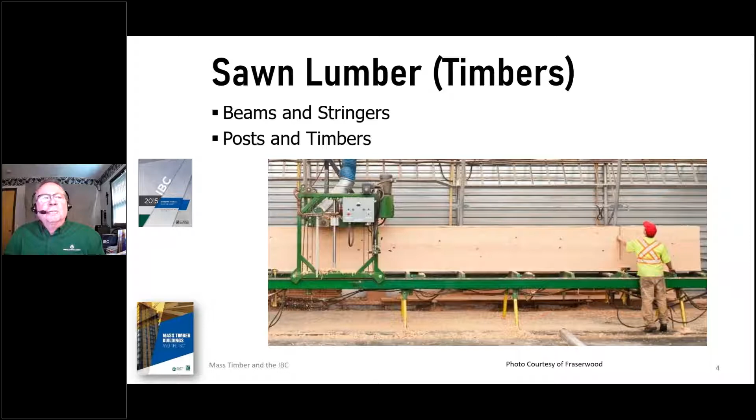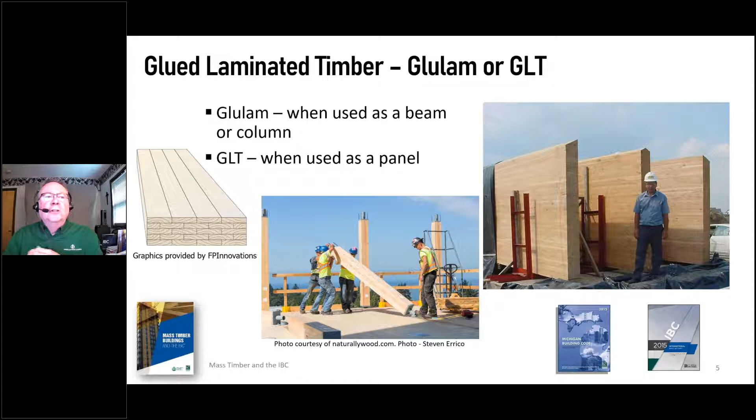Mechanically laminated decking, more commonly referred to as nail laminated timber or NLT, is not so much a product as it is a mass timber element typically made up of appropriately sized sawn lumber that is placed side to side and stitched together with nails. Mechanically laminated means we connect and transfer the load through a very specific and designed load path, which requires a specific fastener schedule to comply.

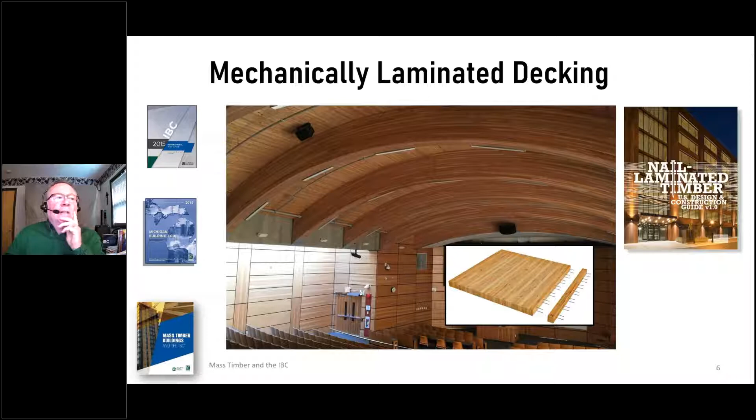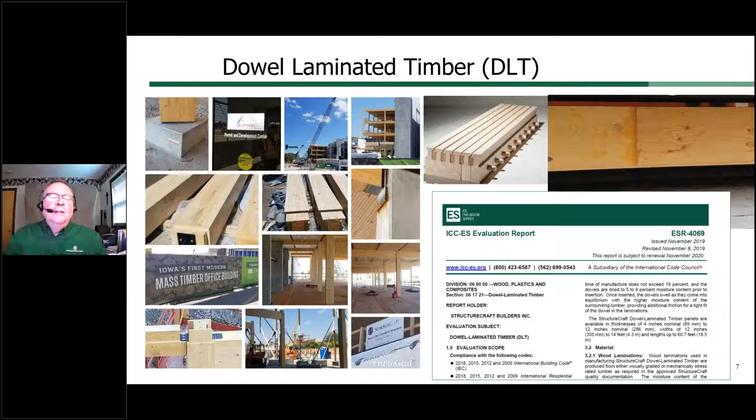Here we have structural composite lumber. Structural composite lumber, or SCL, is a family of engineered wood products created by layering dried and graded wood veneers, wood strands, or wood flakes with waterproof adhesive into blocks of material known as billets. These billets are subsequently milled into specified sizes. Structural composite lumber is defined in the IBC and includes parallel strand lumber, laminated strand lumber, laminated veneer lumber, and oriented strand lumber.

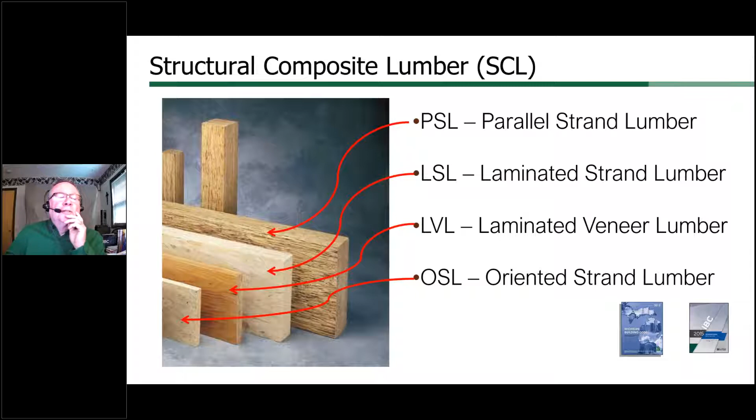Next is CLT, or cross-laminated timber. A CLT panel might look similar to the GLT panel from an earlier slide, but in this case, the lumber laminations are provided in an odd number, with each lamination laid up 90 degrees to the previous one. The odd number is so the top and bottom laminations run in the same direction.

You'll note the similarities to plywood sheets, but instead of thin veneers running 90 degrees to one another, for CLT you have those layers on a much larger solid sawn lumber scale.

As a note, CLT, as opposed to GLT panels or NLT panels, has a two-way strength axis. Remember that the strongest configuration is when the CLT panel is installed with its top and bottom laminations perpendicular to a bearing wall or supporting column and beam line below.

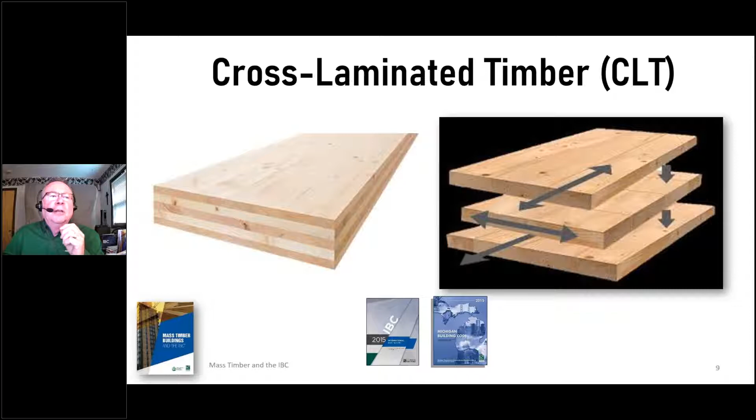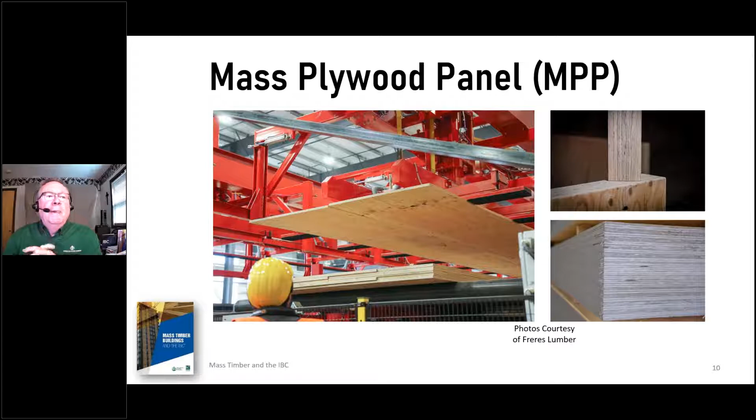Mass plywood panels, or MPP, are actually the newest on the block. They're manufactured using plywood sheets as the laminations to make up the large thicknesses required to be considered mass timber within the building code. This is a new product that would typically require acceptance by the code official as an alternate on a project until such time as MPP is referenced within the building code.

For the next few slides, I'd like to touch on some of the significant changes regarding mass timber that have taken place in the newest editions of the building codes, starting with the current building code in Michigan, the 2015 IBC. The 2015 IBC has provisions to allow mass timber products in all types of construction, but 2015 is when the manufacturing standard and provisions specific to CLT were included.

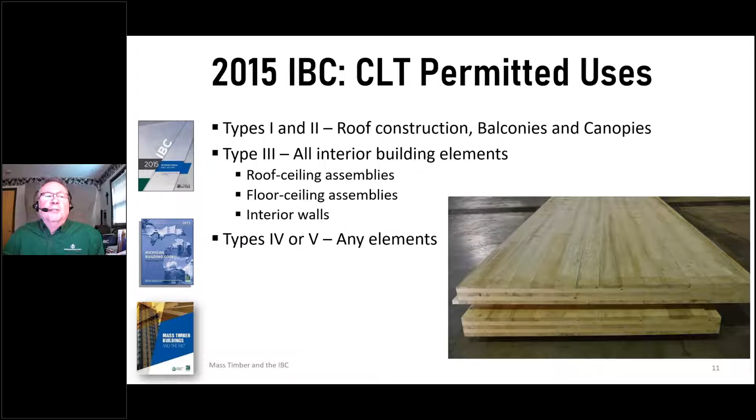This slide is specific to the permitted uses for CLT. For types 1 and 2 construction, CLT can be used for roof elements or for balconies and canopies. For type 3 construction, CLT can be used for all interior building elements. For types 4 and 5 construction, CLT can be used for any of the building elements.

We're now moving up to the 2018 edition of the IBC. This slide is just a short list of what might be considered the significant changes related to mass timber that have taken place in the 2018 edition of the IBC. You'll note that I've included the code change number in parentheses for those who want more details. We have all of that information available on our website for you.

I included in section 510.12 as the first item, a special occupancy pedestal provision allowing up to a 9-story CLT building of R1 or R2 use.

In section 602.3, CLT is allowed for exterior walls of type 3 construction. Throughout section 602.4, SCL elements were added. Provisions for the safe use of concealed spaces were added for type 4 construction. Also in section 602.4 is included the allowance for the use of GLT and SCL elements as part of a CLT exterior wall when you're in type 4 construction.

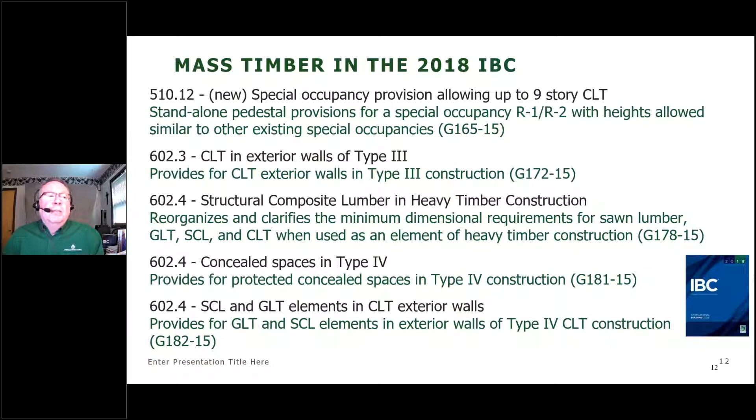Here's a little more detail on one of the 2018 IBC significant changes. In the 2018 edition of the IBC, the minimum dimensions for heavy timber have been reorganized and moved from Chapter 6 to Chapter 23, the wood chapter, with no changes in the minimum size requirements. The familiar table shown here has always been known as Table 602.4, but by moving it becomes Table 2304.11.

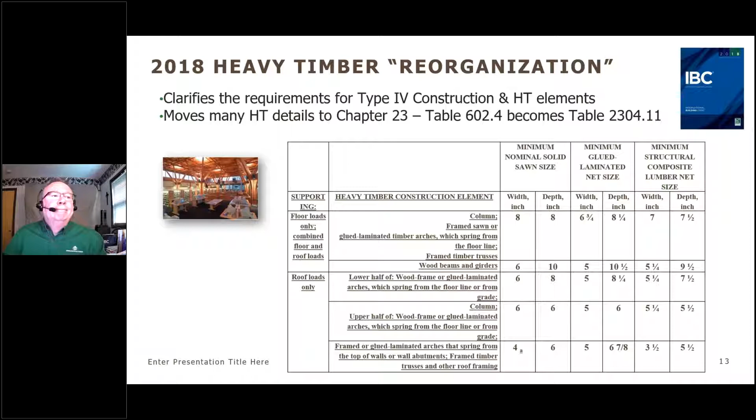Now I'll step forward to the 2021, or newest, edition of the IBC. The Tallwood Building Ad Hoc Committee found it necessary to develop a couple of new definitions for inclusion within Chapter 2 of the IBC: mass timber and non-combustible protection. The definition for mass timber is based on the same minimum cross-section dimension as traditional heavy timber. Non-combustible protection is needed as a definition to provide the enhanced fire resistance and safety to align with 2 of the 3 new types of construction that were added to the 2021 edition of the IBC.

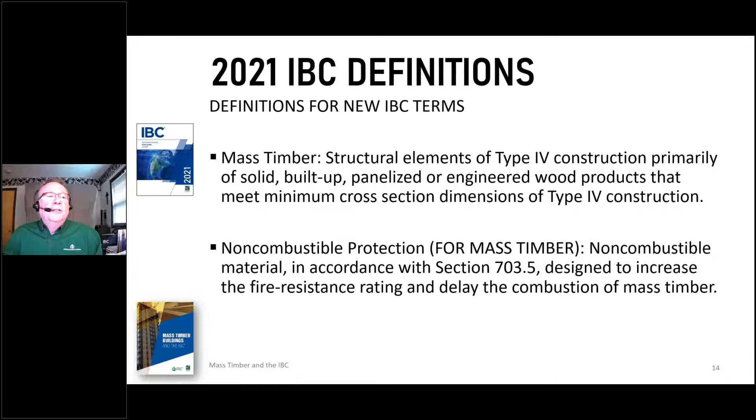Speaking of those construction types, this is perhaps the most significant change to the IBC for quite some time. That took place with the creation of 3 new types of construction described here. The new types are designated as types 4A, 4B, and 4C. The old heavy timber is redesignated type 4HT.

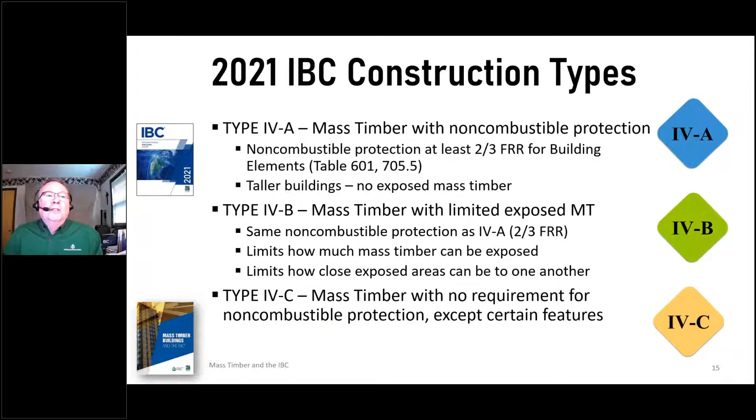Type 4A has to have all the combustible mass timber elements covered with the aforementioned non-combustible protection. The protection amounts to 2/3 of the element's fire resistance rating. Type 4B requires the same 2/3 of non-combustible protection, but allows a small portion of the mass timber elements to be exposed. Type 4C allows almost all of the building elements to be exposed, but does require 2 hours of fire resistance for all of the mass timber elements.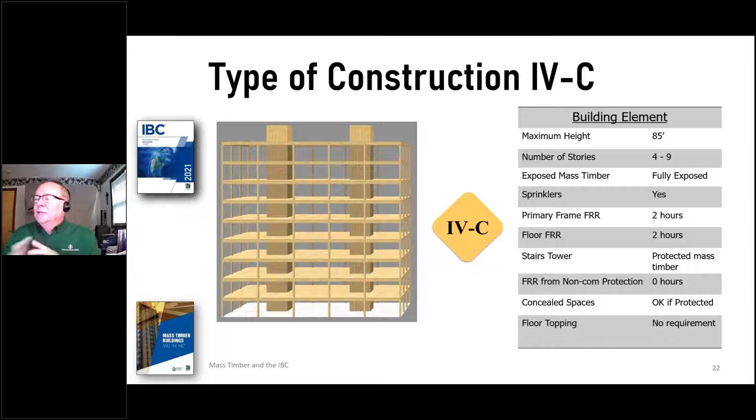In this case, what I have for you is an example. First, I want to emphasize that for all of these new construction types, sprinklers are required to get to these sizes. Sprinklers are a significant need in all types of tall buildings, whether you're dealing with mass timber or tall towers of non-combustible construction. No combustibles are permitted on the outside of exterior walls or within concealed spaces.

This last slide for the 2021 IBC comparatively illustrates the heights and areas permitted for the Group B, or business, occupancy. That's the occupancy which allows the tallest buildings. The heights are the same for residential Group R occupancies, with the exception that type 4C is limited to 8 stories instead of 9. For type 4A, the tallest maximum height is 18 stories and 270 feet. The allowable area is 972,000 square feet per building, averaging 54,000 square feet per story if equally divided.

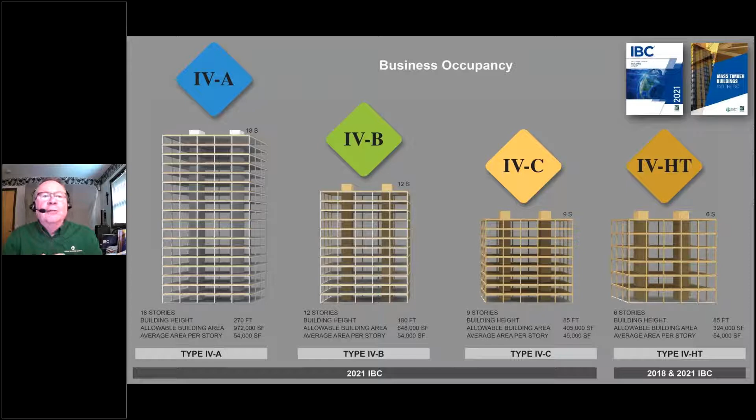4B drops down to 12 stories and 180 feet, with 648,000 square feet allowable area for the building, averaging 54,000 square feet per story if equally divided. In type 4C, 9 stories is the maximum height at 85 feet, with 405,000 square feet allowable area per building, averaging 45,000 square feet per story if equally divided. Type 4 HT, the old type 4, is 6 stories at 85 feet, with 324,000 square feet allowable area, averaging 54,000 square feet per story if equally divided.

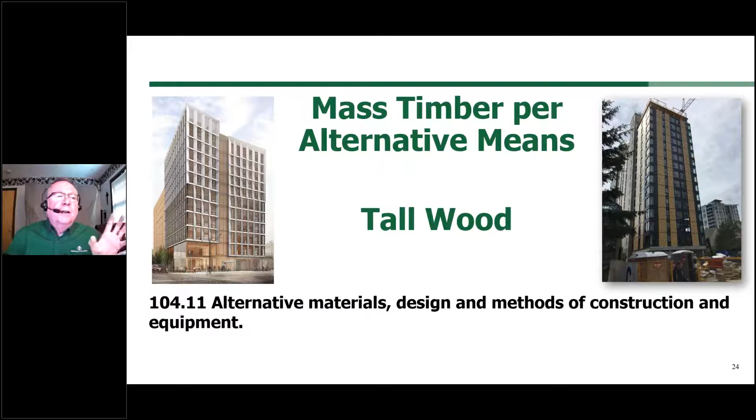For the last couple of slides, I wanted to show examples of buildings built, and being built, using the alternative means provisions of the code. That's the provision in section 104.11 of the IBC, for anything that's alternative. This is the Carbon 12 project, located in Portland, Oregon. It was topped out in May of 2017 and completed in 2018. Carbon 12 is a residential tower that is 8 stories tall.

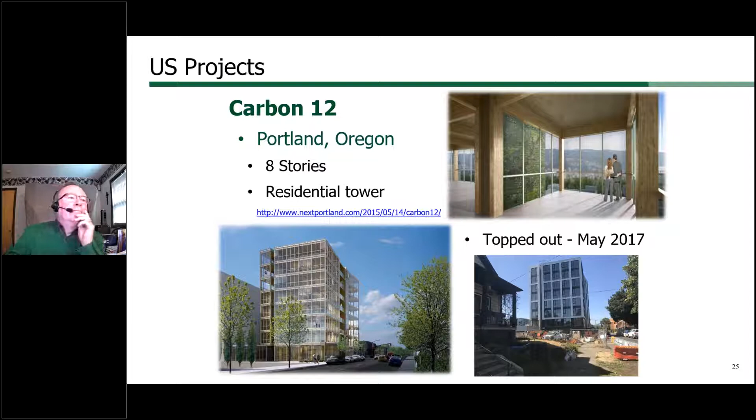So with that, I'll turn it back over. Jim, you did wonderful. You're actually ahead of schedule, so thank you so much. I have a tendency to talk fast. I must not be the only one here this morning that talks a little bit fast. Yes, yes.